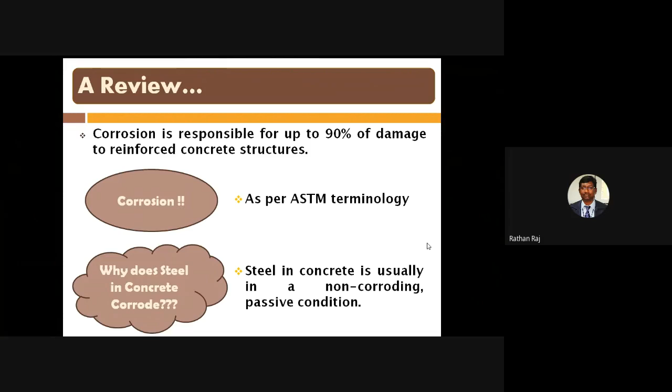Before the corrosion starts, the steel is in the passive state. After that, because of these reactions—electrochemical reactions or carbonation—corrosion starts on the reinforcement, and it builds up on the surface of the reinforcement. Further, the corrosion reaches the surface by means of a crack. So it is called the cancer of the concrete.

So when you look at the reinforced concrete on the surface, it is over the years together that this reaction will take place.

We cannot see what is happening inside the concrete. So once it reaches the surface of the concrete, only then can we identify that cracks have formed on the building. If we are not aware of this kind of crack, eventually there will be falling of the concrete. After the concrete falls, if the rod gets corroded, we have to take more remedial measures for repairing the concrete. So once any crack is available in the reinforced concrete, immediate necessary care must be taken to avoid further corrosion and spalling of the concrete.

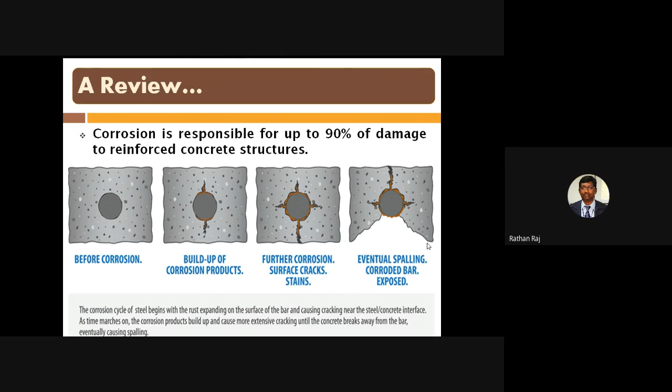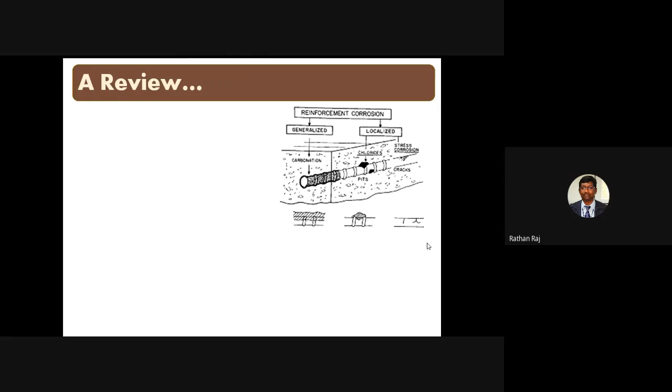Now, particularly when we talk about reinforcement corrosion, there are two different types of corrosion. One is electrochemical corrosion, also called chloride corrosion. Another one is carbonation. Both the electrochemical corrosion and the carbonation occur due to certain reactions caused by external forces.

Now, particularly when we talk about chloride-induced corrosion in steel reinforcement, the concrete is often used to serve in an environment where seawater or deicing salts are present.

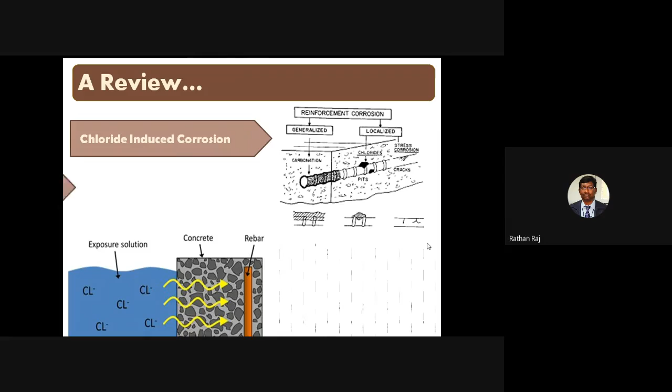So this corrosion is termed localized corrosion. Now when we talk about the next type, corrosion due to carbonation, this is called generalized corrosion. In concrete, when carbonation attacks to the level of the steel rebar, the normally alkaline environment which protects the steel from corrosion is replaced by a more neutral environment. Under these conditions, the steel is not passive and rapid corrosion begins.

This carbonation corrosion may occur after 10 or 20 years, and it will not start immediately if we are using high performance concrete, high strength concrete, or very dense concrete. So it will take years together. After that, due to some deterioration and the porous structure of the concrete, this carbonation corrosion takes place, reaching and affecting the passive layer on the steel.

So first we have to know what carbonation actually is. Carbonation is nothing but the result of the cement hydration process, when cement reacts with water and converts to calcium hydroxide. That is the important element which gives strength to the concrete. As we already know, there are Bogue components - four Bogue components, C2S and C3S - which help improve the strength of the concrete. How does it improve the strength? By forming calcium hydroxide solution, the calcium hydroxide element.

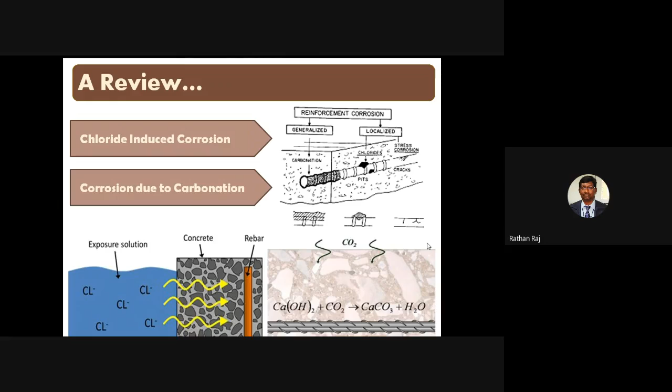When the concrete surface is exposed to deicing salts or seawater, the chloride content is automatically absorbed by the concrete, and it reaches the surface of the rebar, immediately affecting the passive layer on the rebar.

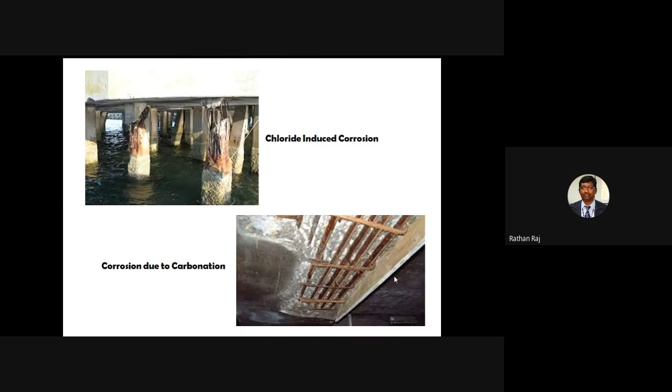Immediately the spalling of the concrete takes place because of the corrosion. Now, what are the factors influencing the chloride threshold? When we talk particularly about chloride induced corrosion, it depends on many factors.

The first factor is the type of cement we are using: the fineness of the cement, the amount of gypsum available, and the blending materials. That means the composition of the material. So we have to be very careful about the composition of the materials available in the cement. And also, if we are going to use some supplementary cementitious material, we have to be very clear and have knowledge of the chemical compositions available.

The second one is water cement ratio. We use different water cement ratios, improving the strength of the concrete by lowering the water cement ratio. If you lower the water cement ratio, we have to take care whether there is any porosity in the concrete, that means any voids in the concrete. So we have to take necessary care in the compaction also.

The next point is the curing and also the compaction. What type of curing, whether we are going for water curing, whether that curing is done for 28 days, or what kind of curing method we are going to use. And during preparation of the concrete, whether the compaction is done well or not. This all leads to the porosity.

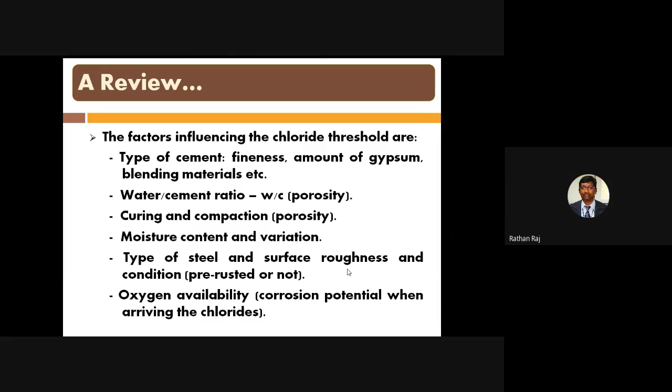Then the type of steel we are using, the surface roughness of the steel, the present condition of the steel, and then the oxygen availability. These are all the factors influencing chloride induced corrosion.

Now, particularly the effect of pH on corrosion. Concrete always has a pH value higher than 10. So the metal becomes passive and the corrosion rate decreases with increasing pH value. Normally in concrete the pH value is nearly 11 to 13.5, and approximately the average value is taken as 12.5.

So what is actually the effect of pH on corrosion? The reinforcing steel in concrete is usually in the passive state because of the high alkalinity of the concrete pore solution. However, the passivity may be lost, and corrosion occurs on the steel due to the decrease of pH due to carbonation. As already told, carbonation does not happen immediately.

After maybe 10, 15 or 20 years only can you identify the carbonation, where calcium hydroxide is converted to calcium carbonate. This happens because of the loss of pH in the concrete. So the steel bar used in reinforced cement concrete is protected from corrosion only because of this high pH environment, where steel becomes more passive.

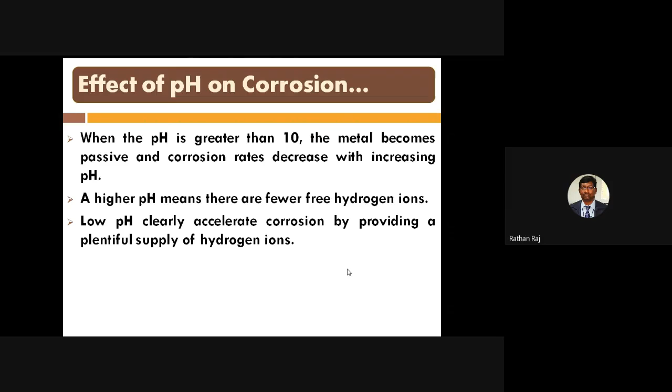Now this picture shows the iron at the anode, and due to the lower pH value, some carbonation takes place. Two electrons separate, and those electrons react with the moisture content, simply the water content, and it converts to hydroxyl ions. So more hydrogen ions develop in the concrete, and it will affect the reinforcement. Then the pitting corrosion will start.

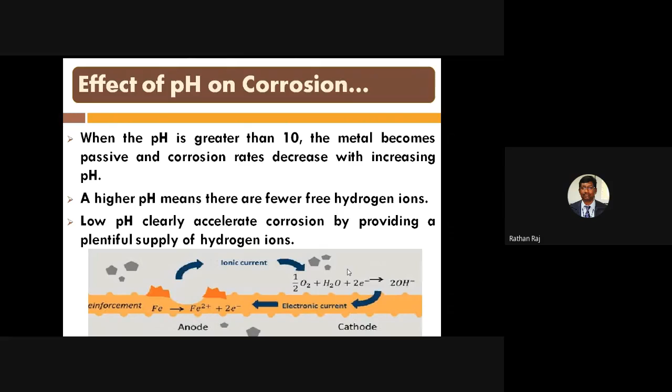So in case of reinforcement corrosion, what are its consequences after the corrosion? This figure is the most simple and descriptive model for the service life of a reinforced concrete. The corrosion will not take place immediately unless the steel contacts water, because it is a reinforced concrete. The reinforced concrete is a hardened material, and the concrete we are using is a non-porous material through good compaction. So the initiation period will take more time.

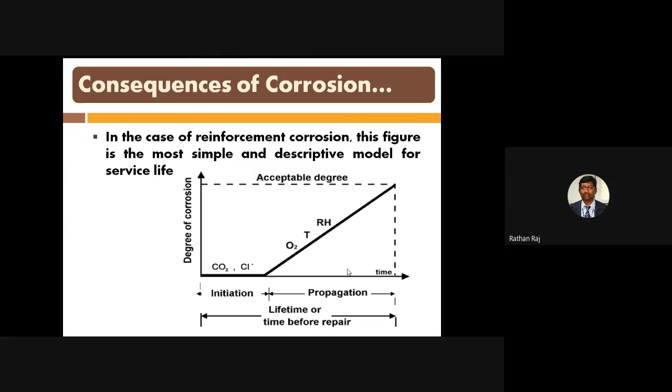Once the initiation starts, it is all due to the relative humidity in the particular region, the temperature, and also how much oxygen and carbon dioxide, and sometimes chloride, is present, for example nearby seawater penetration or de-icing salt. So depending on all these factors, it will start the corrosion. Once the corrosion is initiated, it will propagate. We cannot prevent it unless we identify that cracks have developed on the concrete; only then will we know that corrosion is taking place in the reinforced concrete.

So this is a well-known model, and it is considered that there is an initiation period, which consists of the time from the erection of the structure until the aggressive agents, which may be chloride or carbonation, reach the rebar and depassivate the steel. So that passivation layer immediately gets affected and becomes depassivated. And then a propagation period from the steel depassivation until a certain unacceptable level of deterioration is developed in the structure.

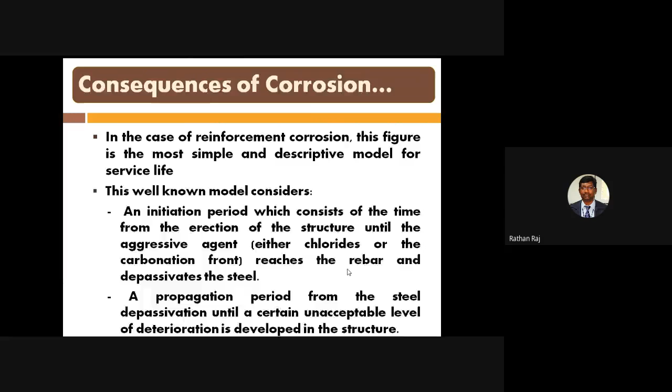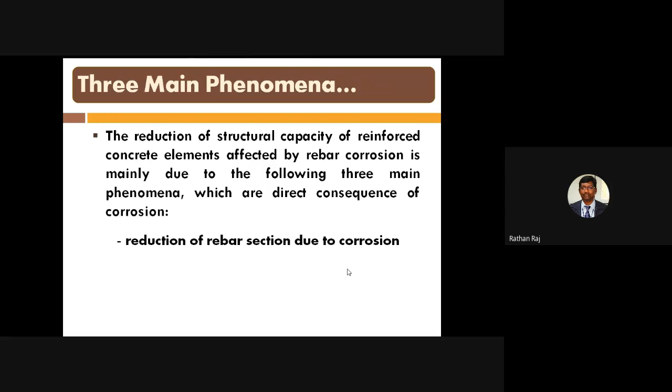So there are three main phenomena when we talk about the reduction of the structural capacity, or the reduction of the strength of the reinforced concrete element affected by rebar corrosion, which are direct consequences of the corrosion. What are the phenomena? The first is reduction of the rebar section due to corrosion, the second is a reduction of the bond strength, and the third is loss of concrete integrity due to cover cracking, which also leads to spalling of the concrete.

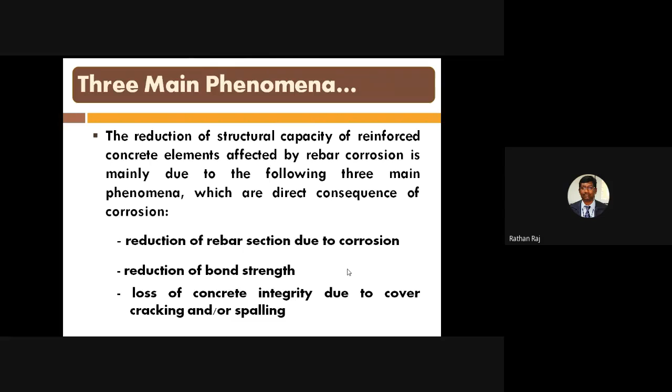Now there are some methods with which we can prevent the corrosion. A variety of methods are available nowadays, and when we use them we can at least slow down the corrosion process. The most common preventing methods are the galvanization method, the cathodic protection method, electrochemical chloride migration, which is called the desalination method, the realkalization method, and fifth, corrosion inhibitors, along with repair techniques. The first four methods are well known. If you go through the internet or some literature, you will get the process and procedure to be adopted for these methods.

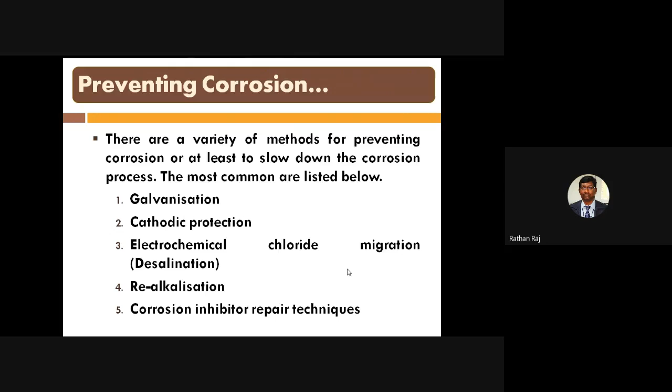So particularly I want to talk about corrosion inhibitors, because nowadays people are using more corrosion inhibitor in the concrete from the starting stage itself. 10 or 20 years ago, people were not aware of applying non-corrosive paints or chemicals on the steel rebar. Now in major construction, and even in smaller construction, people are very much aware, and before the steel reinforcement is embedded into the concrete, the steel rebars are applied with some chemicals.

So what actually is a corrosion inhibitor? It is a chemical compound. Various types of chemical compounds are available in the market nowadays, and when added, they decrease the corrosion rate of the material. There are many types of corrosion inhibitors available: anodic inhibitors, cathodic inhibitors, mixed inhibitors, and volatile corrosion inhibitors.

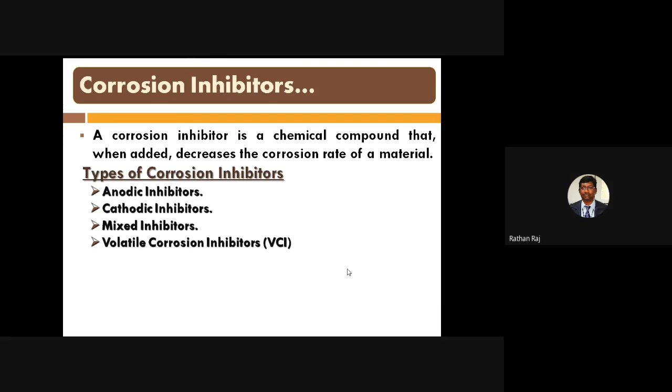How does the corrosion inhibitor work? Inhibitors work by the formation of a coating on the material. This coating prevents the access of corrosive substances to the material surface, protecting the passive layer. The inhibitor molecules either attach to the metal or react with the surface to form a thin and adherent layer. This is the way corrosion inhibitors work.

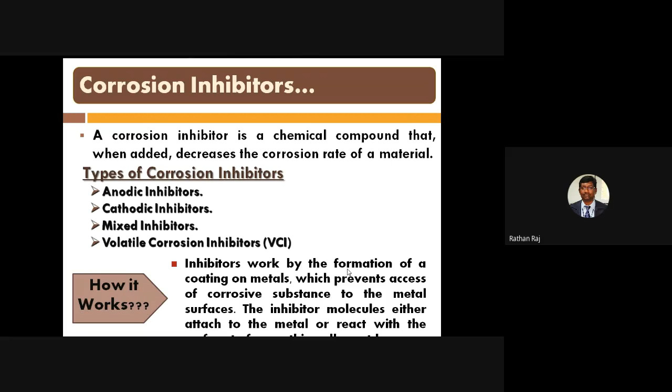In the market nowadays, many types of corrosion inhibitors are available. Sometimes it will be in the form of chemical substances, or in the form of a liquid, or in the form of a paint. So in this decade, actually, all the construction companies, from small companies to big companies, are using corrosion inhibitors. So nowadays, the common method of preventing corrosion in the construction sector is using a corrosion inhibitor.

So now, when we talk about corrosion, people started very early to develop high strength concrete or high performance concrete, particularly for corrosion in reinforced concrete. So they want to develop more dense concrete by using different materials, incorporating some chemicals, some mineral admixtures, some chemical admixtures, by developing high strength concrete and high performance concrete. So we are more concentrated on how to develop the strength of the concrete.

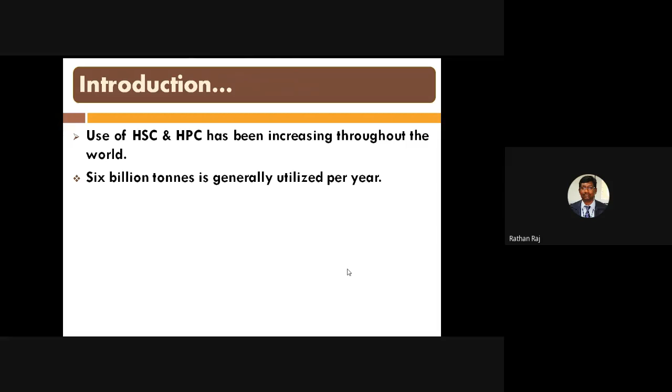So when we talk about high strength concrete or high performance concrete, it is only the concrete. So how much concrete is being utilized per year? The statistics say that every year 6 billion tons is utilized in the construction industries. So when we talk about concrete utilization, we should talk about cement. For developing high strength concrete or high performance concrete or any other kind of concrete, the basic ingredient is cement.

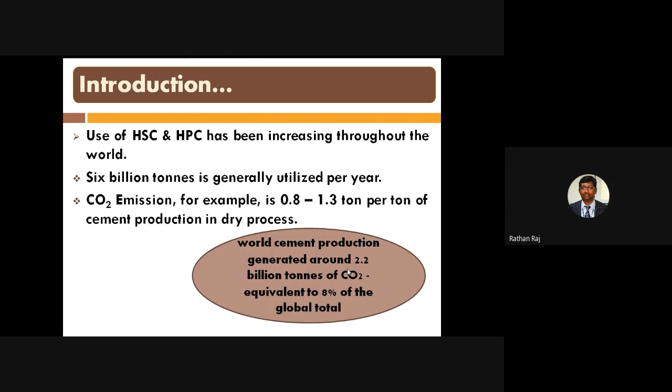So cement production will emit carbon dioxide. For example, 1 ton of cement production will emit nearly 0.8 to 1.3 tons of carbon dioxide in the dry process. And normally, people say that 1 ton of cement production will emit nearly 1 ton of carbon dioxide. Moreover, world cement production generated nearly 2.2 billion tons of CO2, which is equivalent to 8% of the global total emission of carbon dioxide. So cement production holds 8% of the global total emission. So we have to minimize the cement content, but in no way compromise the strength of the concrete.

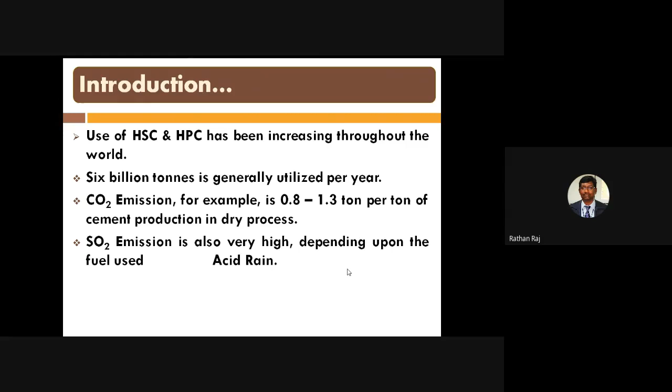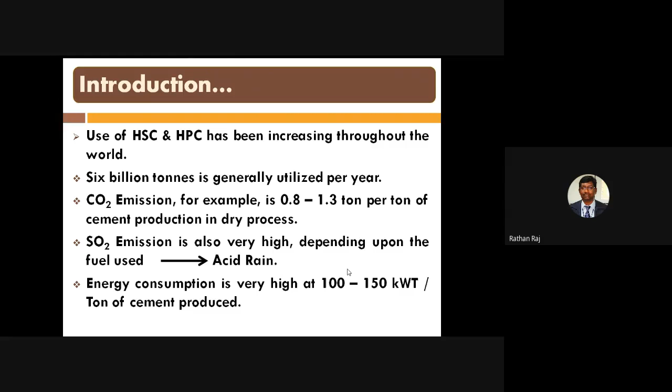Now, besides CO2 emission, another one is SO2 emission. It is also very high depending on the fuel which is used. It leads to acid rain. And another point: when we use more cement, the energy consumed is also very high, because we are producing cement by the dry process using a huge amount of heat. That will be nearly 100 to 150 kilowatt per ton of cement produced. Because of all these points, nowadays SCMs are to be used.

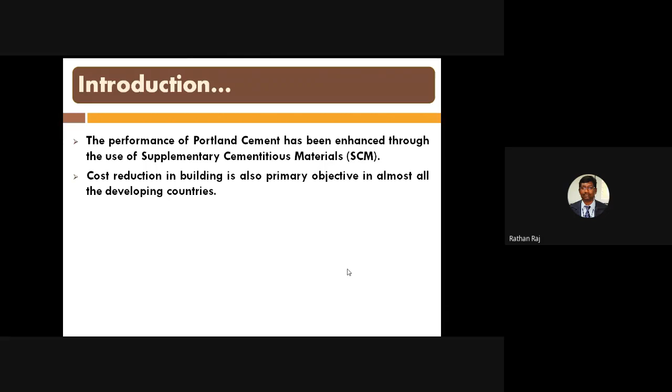So the performance of Portland cement has been enhanced through the various uses of supplementary cementitious materials, as we know. Initially, supplementary cementitious materials were used only to improve the performance of the concrete; later we found another aspect, cost reduction in building. So when cement is replaced with these supplementary cementitious materials, automatically the cost will be minimized. Not only the cost, we can reduce carbon dioxide emissions and SO2 emissions also. All the developing countries are doing this now.

And now, particularly, the mining and mineral industries produce a huge amount of waste, which is called byproducts. It is not otherwise put to any use. Only limited byproducts are identified which are rich in silica and rich in calcium, with some chemical components satisfying the requirements of cement. Moreover, it is equivalent to cement also. That is being widely used nowadays.

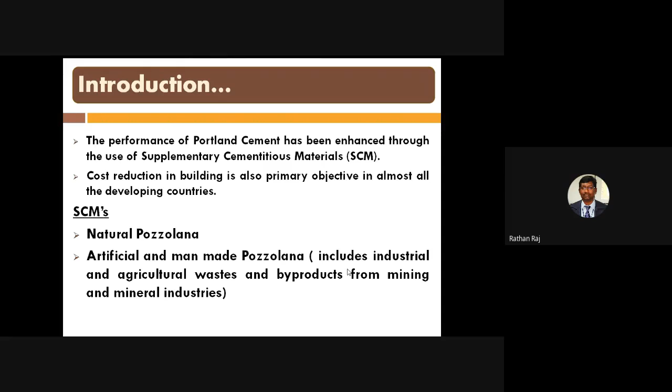We'll discuss one by one. So we'll talk about the classification of the waste and byproducts. There is one report from the Energy and Resources Institute, called the TERI report. The TERI report grouped the classification of the waste and byproducts into three groups.

So 30 years back, people used to replace part of the ordinary Portland cement with fly ash. Nowadays we know Portland pozzolana cements are available everywhere. It is fly ash based, or sometimes slag based cement is also available. So ordinary Portland cement converted to another product, the Portland pozzolana cement, in terms of fly ash and slag. These are the main two types of cement being utilized in India nowadays.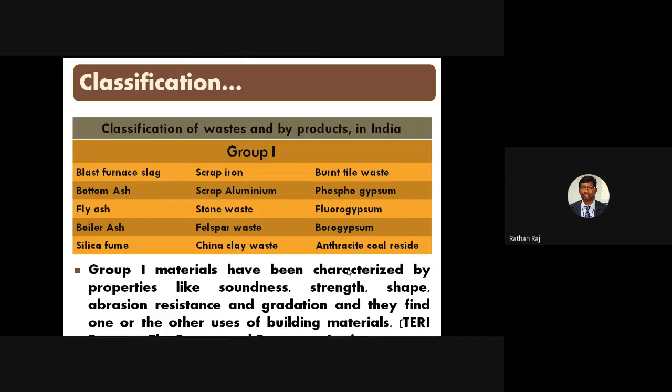And the group 2 waste, as the TERI report classified it. Group 2 materials are used on a limited scale because they require some processing before utilizing in concrete. That's why these materials are grouped into the second group. Some of them did not quite satisfy unhindered utilization or conform to the Indian standards.

The group 1 waste conforms to the Indian standard because its chemical composition is nearly equal to cement. Sometimes one chemical compound is in more amount, sometimes less, but all the chemical compounds are available. But that is not the case with group 2 waste. Some group 2 materials are quite unsatisfactory because they do not conform to the Indian standards.

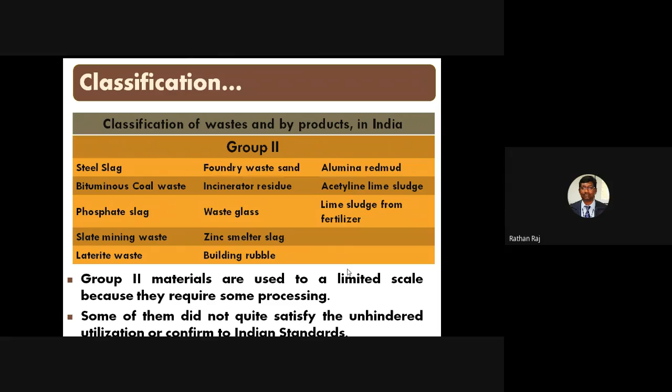But still there are a few wastes whose properties have not been properly identified. So if you start research on a particular material, starting from the characterization and studying the properties, it is good research. You will get a good outcome. These are all the group 2 waste.

Now the group 3 waste: these have been investigated quite thoroughly, but there are no standards or specifications available. That is because of some undesirable constituents like alkalis, P2O5, SO3, and titanium oxide present in this material.

So with group 3 waste we have to be more careful when selecting it for use in concrete, and most probably this waste should be avoided. If you want to use this waste, you have to be very careful. You have to know the characterization, the properties, the physical and chemical composition. After studying all these, we can start replacing cement. These are the 3 classifications.

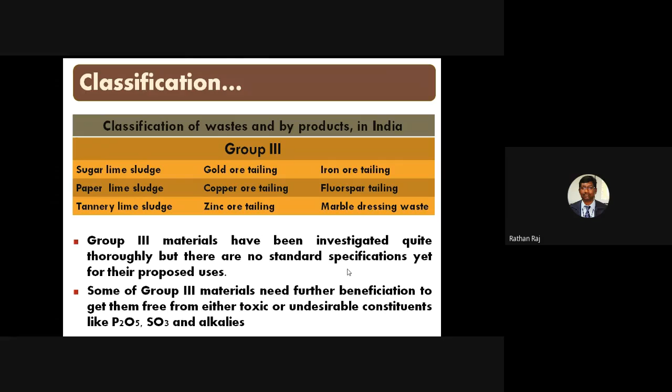So here, in this research or investigation, I used metakaolin and red mud as supplementary cementitious materials. Metakaolin is a natural pozzolana. Technically it is called a kaolinite product, formed from kaolin, which is abundant in India. We have it in two places: one is Jharkhand, another is Kundara in Kerala.

This material was obtained from English Indian Clays Limited, located in Kerala, and the metakaolin is technically called Metacem, or commonly a China clay material. After heating the kaolinite product to 800 degrees, this Metacem or metakaolin is produced.

This is a natural pozzolana, and the red mud is nothing but the waste product from the alumina-related industry. This waste material was obtained from the Malco industry located in Mettur. After extraction of the alumina, this is the waste material, which is enriched with caustic soda, meaning a high pH value. It is left as a waste material.

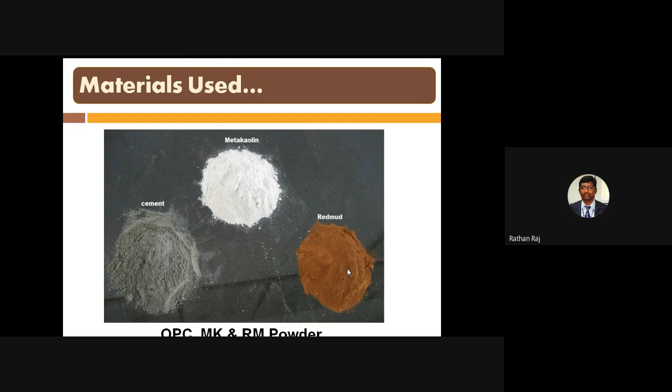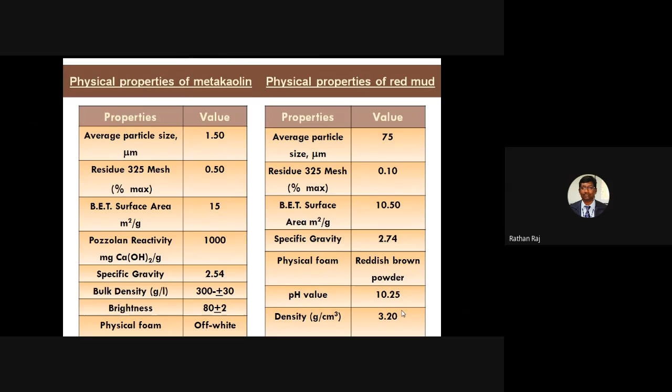Now this is the physical properties of the cement. The physical properties you know very well, so I don't want to discuss them elaborately. Come to the physical properties of the metakaolin. The reason I selected metakaolin is its pozzolanic reactivity, due to the silica content and calcium content present in the material. And as a physical property, the red mud has a pH value which at that particular time was more than 10.25. This 10.25 is maintained throughout the concrete life.

So the chemical composition of the cement, metakaolin and red mud. As I already told, whatever supplementary cementitious material or replacing material is used for the concrete, we should be more concerned about what chemical components are available. For example, in the metakaolin, the silica content is very high, 52.3%. And the unwanted Al2O3, aluminum content, is also available. It depends on the variation of the extraction and is also time dependent. At that particular time the amount was very high, and the iron content is very low.

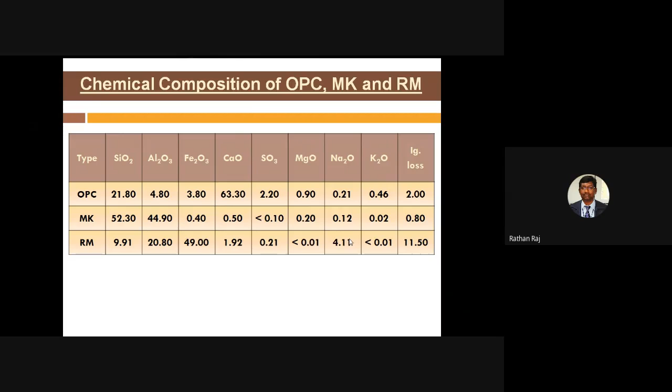But in the red mud, see that there is low silica content. Alumina content and iron content are very high. Calcium content is very low. Some unwanted alkalis are also present, namely Na2O, at a high amount of 4.11, and some others are also found, TiO2 and so on.

Let me discuss the XRD. Why is the XRD pattern of the cement and of the supplementary cementitious material needed? We have to be in a situation to identify what elements are present in the material. When we see only the chemical composition, we cannot know easily. We have to identify the particular elements and whether each element is reactive or not. So this is the XRD pattern of the cement, which identifies the peaks and low curves. Each point will be identified.

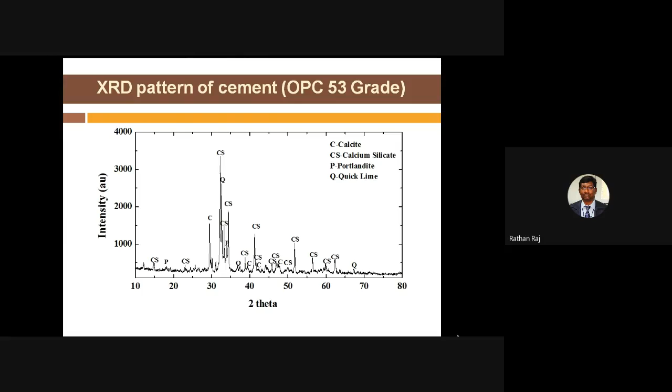C is a calcite element; wherever you see C, it is calcite, and CS is calcium silicate. P is portlandite, and Q is quicklime. Quicklime is nothing but calcium oxide, the calcium content. Now the CS content is the calcium silicate content. Before hydration, the cement has more unreactive calcium silicate. When it reacts with water, that calcium silicate converts to calcium silicate hydrate in the form of C3S and C2S, and further it reacts with the silica present in the material, and more calcium silicate hydrate bonds are formed. It's a hexagonal bond which improves the strength of the concrete.

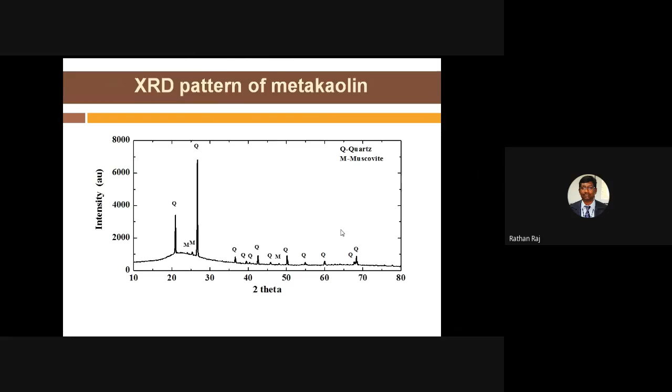Now when we see the XRD pattern of the metakaolin, only two important elements are identified. One is quartz, another one is mica, called muscovite. And in the XRD of red mud, many elements are identified: calcite, gibbsite, hematite, hydrogarnets, perovskite, quartz, and rutile. See, the unwanted and undesirable material called rutile is identified in this material. This rutile is nothing but titanium oxide.

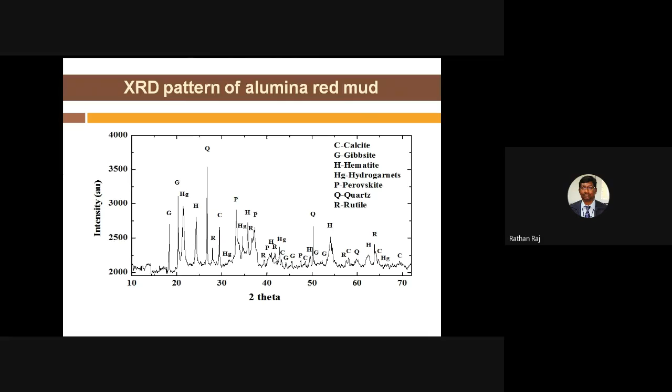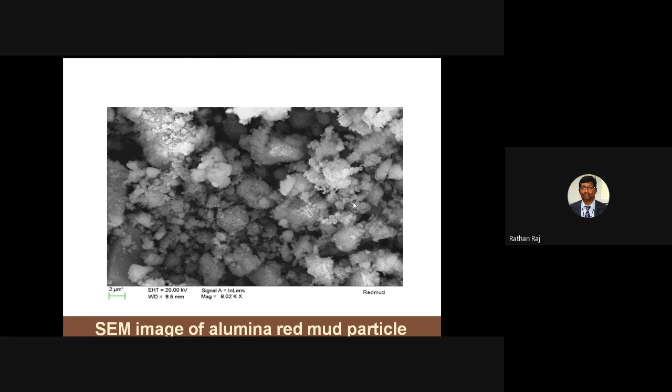When we talk about corrosion, we should talk about the diffusion coefficient, notated as DC, the DC of chloride ions. This increases with a rise in water-binder ratio, and decreases with an increase in mineral admixture or other additives.

So when we use additives like mineral admixtures replacing cement, increasing the amount of mineral admixture surely decreases the diffusion coefficient value. The diffusion coefficient tends to increase with increased voltage of 30 volts in a steady state method.

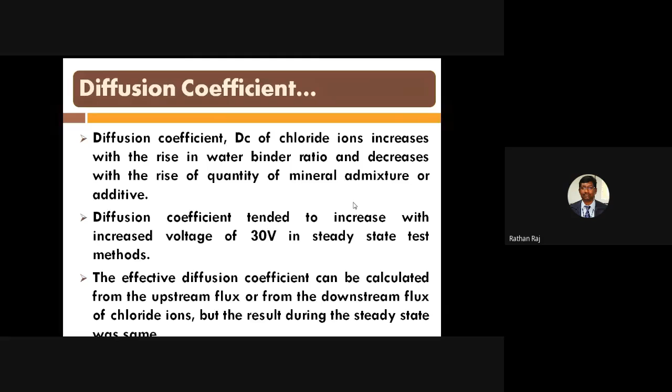The effective diffusion coefficient can be calculated from the upstream flux or from the downstream flux of the chloride ion, but the results during the steady state were similar, as we can see elaborately here.

For diffusion coefficient, two methods are being used nowadays to find the diffusion coefficient. The very common method is the rapid chloride penetration test, which is based on American Standard Testing Method C1202-97.

Nowadays in the literature you can see another method called accelerated chloride ion diffusion test, simply called ACID. This is nothing but a modified RCPT, the rapid chloride permeability test, also conforming to ASTM 1202. There is no separate code available, and the procedure is the same as used for the rapid chloride permeability test.

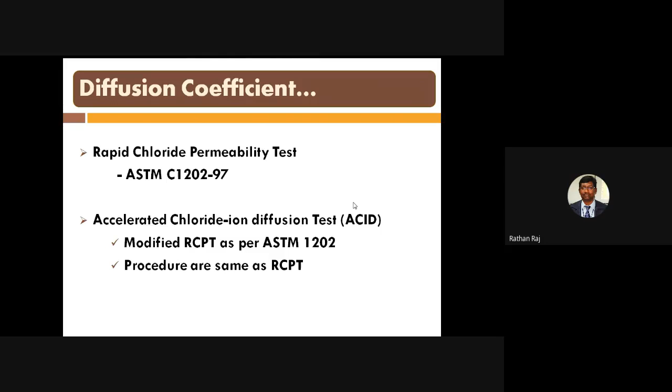This is the detailed drawing of a diffusion cell. The diffusion cell consists of two chambers or containers: one acting as negative, the other as positive. In the negative, NaCl solution, sodium chloride solution, is used, and in the positive, NaOH of 3 normality solution is used.

This is the concrete disc, 50 mm thickness, 100 mm diameter, which is carefully sealed with sealant to prevent solution from coming out of the chamber, and it is screwed up. This is the schematic view of the diffusion cell.

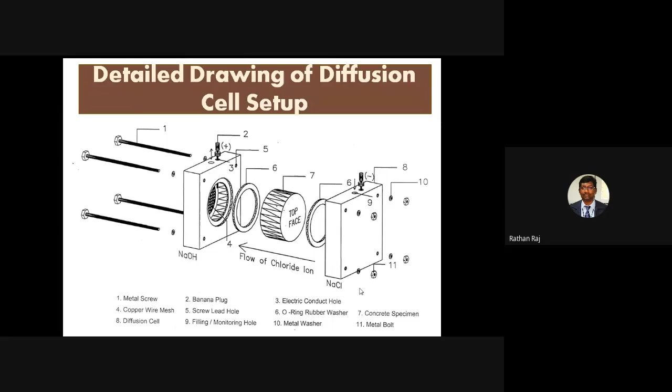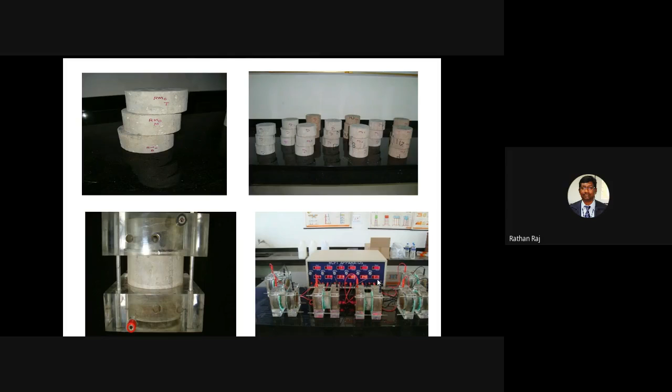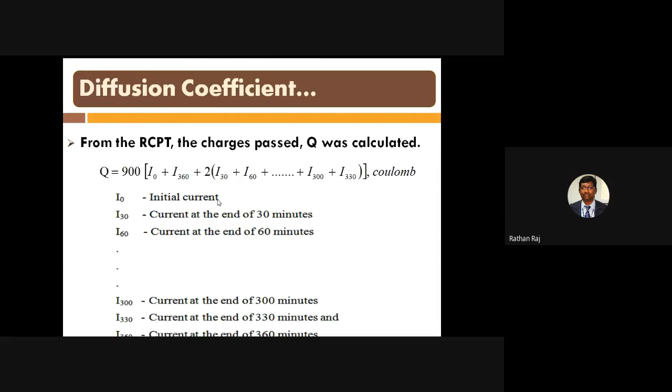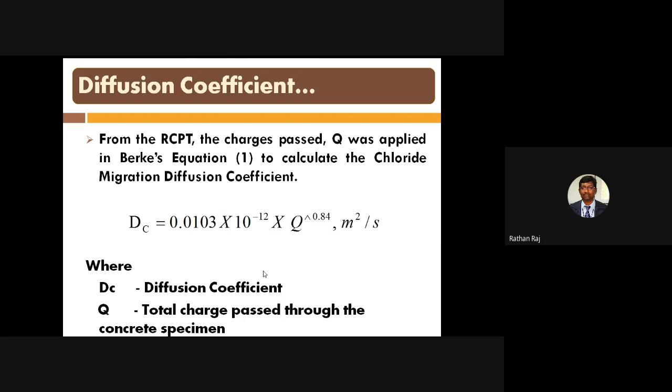The diffusion coefficient value is calculated using Berke's equation. After substituting the Q value in this Berke's equation, we get the diffusion coefficient, DC. Here the only variable is the charge passed, the Q value. After that we get a value denoted in meters squared per second. Now, the limitation of the chloride diffusion permeability.

So what are the limitations? If the coulombs value, the charge passed Q value calculated in coulombs, is more than 4,000, we can conclude that the chloride permeability is high. 2,000 to 4,000 is a moderate value. 1,000 to 2,000 coulombs, the chloride permeability is low, and 100 to 1,000 coulombs, it is very low. When it is less than 100 coulombs, it is negligible, with no chloride permeability. Based on this coulombs value, we can identify whether the produced concrete is good in terms of chloride permeability, or low, or moderate.

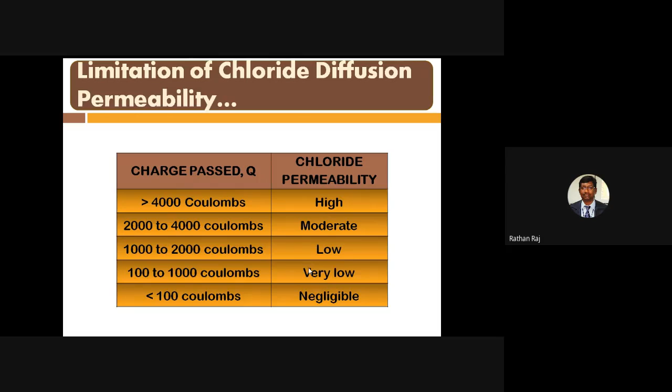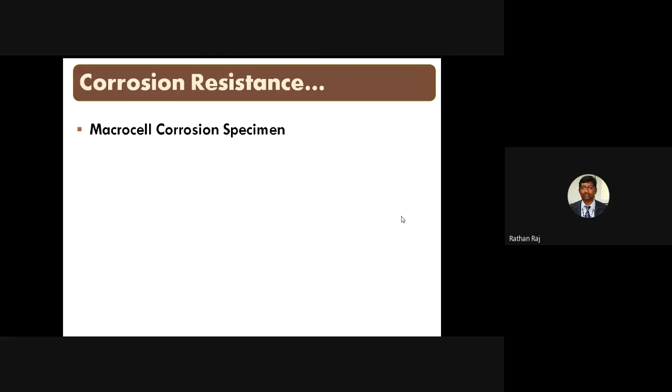Now, when we talk about corrosion resistance, there are two different types of specimens used for identifying the corrosion of the steel reinforcement. One is the macro cell corrosion specimen, which will be looking like that.

Always for the macro cell corrosion, a concrete beam or rectangular specimen is casted, having 3 rods. Normally the rod is 10 mm thickness. One is acting as an anode, another 2 are acting as cathode. This will be connected to the potentiostat, and then epoxy resins are applied on the surface of the concrete.

At the top, there is one container which is fixed, and it will be sealed by using some sealant, and then sodium chloride solutions are allowed to stay inside the container. After some period of time, 15 days, or sometimes we go for 30 days, depending on the period.

Due to that, the chloride content present in the sodium chloride will be absorbed by the concrete, and it will reach the anode, and it will affect the passive layer on the steel. This is how the macro cell corrosion test is done.

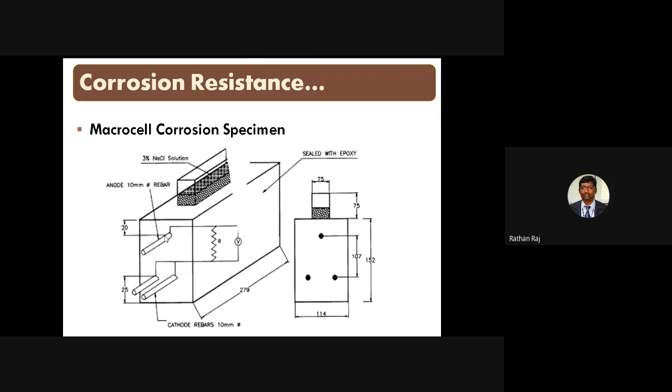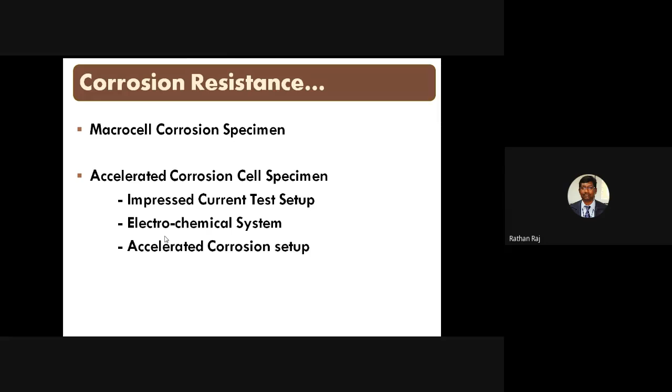The other test is called the accelerated corrosion cell specimen. This accelerated corrosion cell specimen is always in a rectangular beam or a cylindrical specimen. It is also called an impressed current test setup, or electrochemical system, and normally it is called an accelerated corrosion setup. So in this research, I used the accelerated corrosion setup.

This is the accelerated corrosion setup. We have a container filled with sodium chloride solution. This is the concrete, embedded with the rebar. Some PVC sleeves are used to prevent corrosion at the top place.

Carefully it is immersed into the solution up to 3/4, or sometimes only half of the solution. The diameter of the bar used here is 16 mm, and it is connected with the positive terminal - this is called the anode. For the cathode, the negative connection, a stainless steel plate was used.

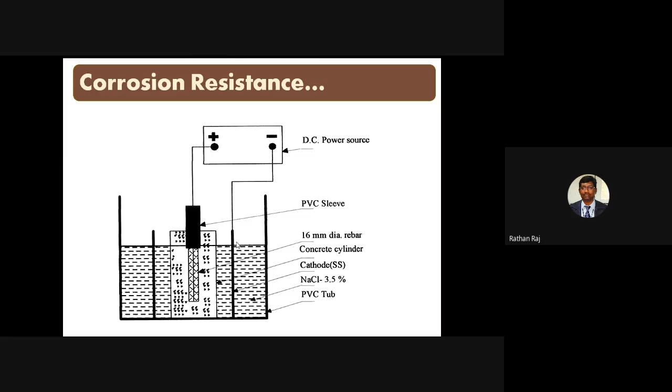To create the aggressive environment, we have to use the sodium chloride solution. Here 3.5% sodium chloride was used, acting as an electrolyte. Half of the cylinder or 3/4 of the cylinder was immersed in this salt water.

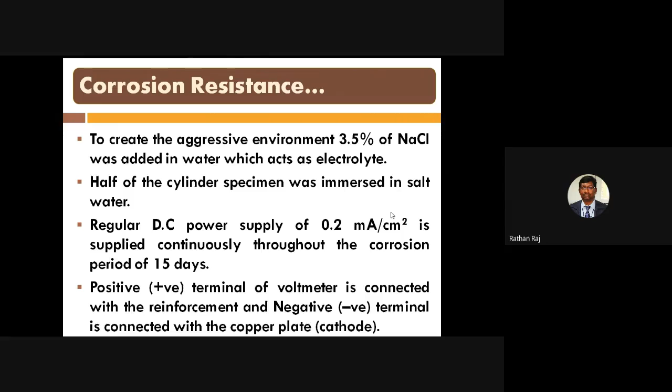A regular DC power supply of 0.2 milliamps per centimeter squared is supplied continuously throughout the corrosion period of 15 days. The positive terminal of the voltmeter is connected with the reinforcement, and the negative terminal is connected with the copper plate, which is acting as the cathode.

This picture shows the entire setup of the accelerated corrosion cell setup. Here all the rods - the anode - are connected to the positive, and here this copper plate is connected to the negative, acting as the cathode.

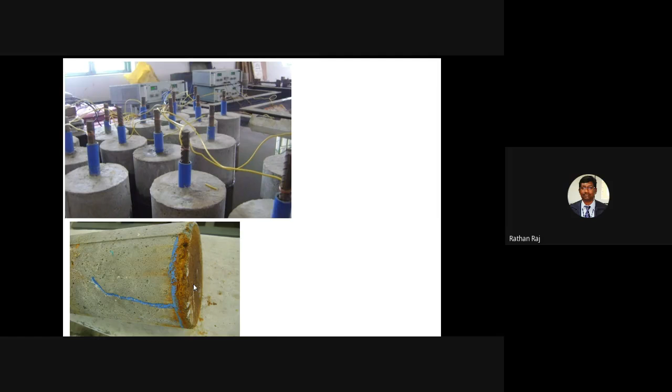After 15 days, corrosion takes place, forming and developing cracks on the concrete. At the bottom you can see the color changes, which clearly shows there was corrosion. After that, using the split tensile method, the concrete is carefully split, and the reinforcement is carefully taken away from the concrete.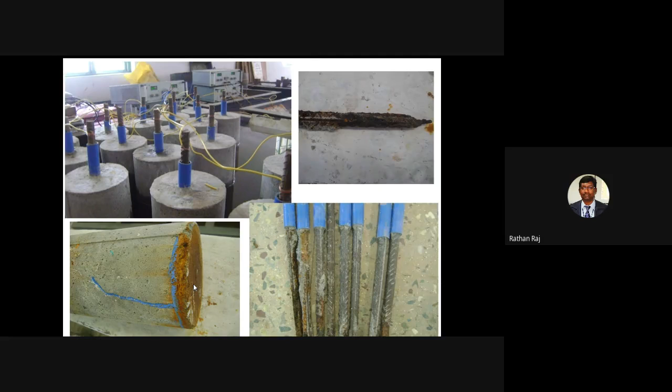These are all the reinforcement bars, particularly in the most severe condition. This is the corroded rod after 15 days of accelerated corrosion.

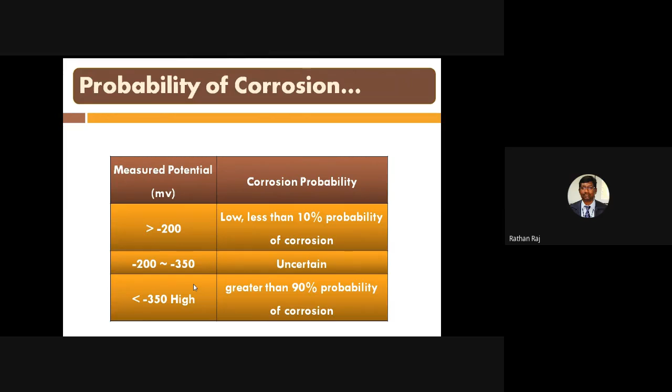So what is the probability of corrosion? By measuring the potential in millivolts from the ammeter reading, we can conclude the probability of corrosion - whether it is low, uncertain, or greater than 90% probability of corrosion.

So now I want to discuss with you some results quickly, based on these two methods: diffusion coefficient and chloride resistance. Here I used metakaolin as one supplementary cementitious material separately, red mud as a supplementary cementitious material separately, and the combination of metakaolin and red mud with different proportions like 50:50, 60:40, 70:30, and 80:20.

Also, four different types of high strength concrete were developed with varying water binder ratios: 0.40, 0.38, 0.36, and 0.33, which correspond to M30 grade, M40 grade, M50 grade, and M60 grade, ranging from 30 Newton per mm squared to 60 Newton per mm squared, designed based on the mix proportion.

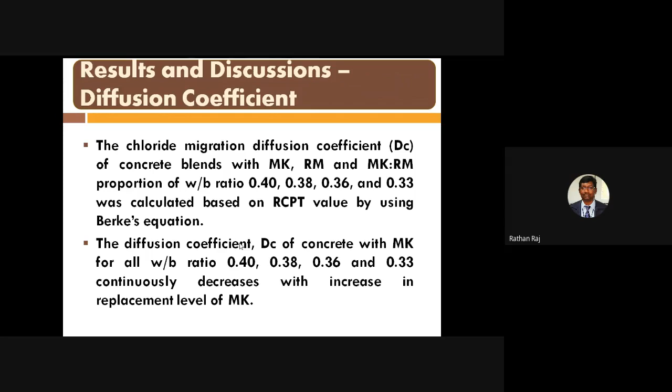This diffusion coefficient was calculated based on the RCPT value only, rapid chloride penetration test value. After that, applying Berke's equation, the diffusion coefficient was calculated. So there are some notable values.

This graph shows that for the particular metakaolin replacement, starting from 2% up to 14%, at all replacement levels the diffusion coefficient is decreasing. As we already know, when we use some supplementary cementitious material in the concrete, automatically the diffusion coefficient value decreases. The reason is that the supplementary cementitious material has more silica content.

So there is some free calcium hydroxide left behind. It is reactive, but there is no reactive silica present at that point. So when we aggravate or create the reaction of the calcium hydroxide, it will react with the silica content and lead to denser concrete and increase the strength of the concrete.

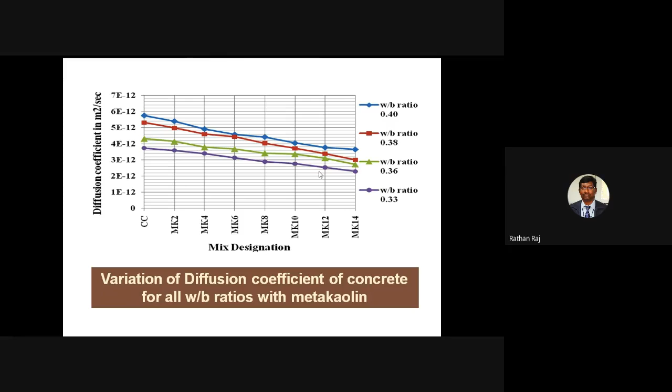Also, when we modify the water cement ratio from 0.40 to 0.33, lowering the water cement ratio improves the strength of the concrete. So here the strength is also increasing, and correspondingly the diffusion coefficient is also decreasing. This shows very clearly that the use of supplementary cementitious material will always improve the diffusion coefficient.

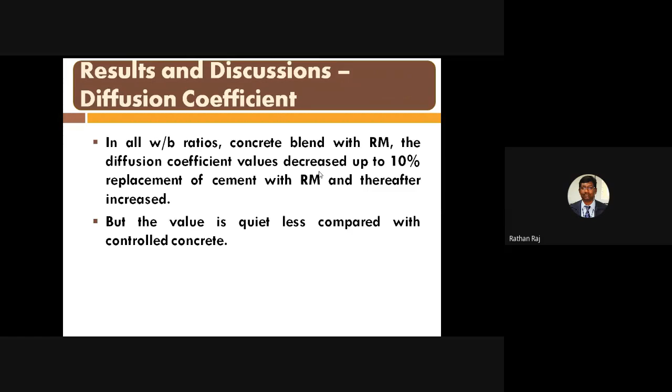But it is not the case with red mud addition. Red mud addition up to 10% shows a decrease in diffusion coefficient. Further, after 12% and 14%, there is some increase in value, but that increase, compared with the controlled concrete, is moreover equal, or sometimes may be very, very less in amount. The reason is that red mud after 8% or 10% slightly increases the diffusion coefficient.

Because when I noticed in the chemical composition, there are some alkalis present, as well as unwanted alumina content and iron content that are more, while silica content and calcium content are very, very less. So there are some unreacted chemical components that do not react with the calcium hydroxide. So automatically the diffusion coefficient increased.

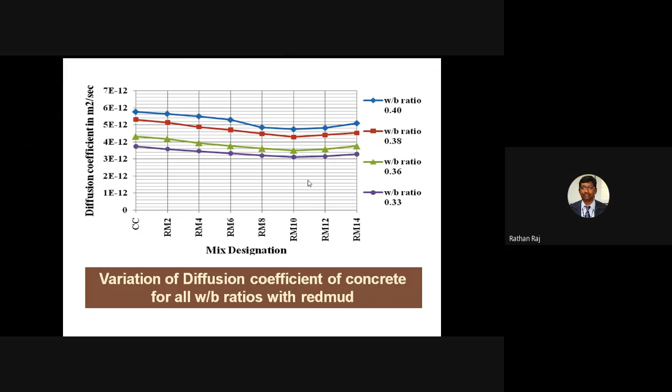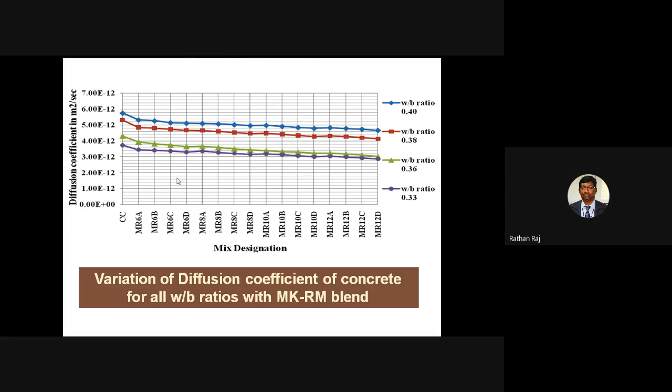These are all 8% replacement, 10% replacement, 12% replacement. So at all these replacement levels and all water binder ratios, the diffusion coefficient is decreasing in a consistent manner. This shows that adding supplementary cementitious material always decreases the diffusion coefficient.

Now, when we come to the accelerated corrosion setup, there are two main focuses for the study of steel corrosion. One is passivation of the steel in a certain alkaline condition. The other is the acceleration effect of chloride ion in the pore solution. So initiation of current corrosion is either due to the reduction in alkalinity.

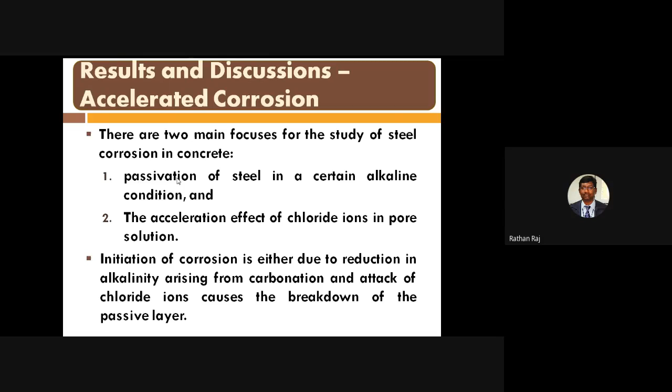That is the very first point, because at a later stage, after 10 years or 15 years, because of the reduction of alkalinity, corrosion starts, carbonation starts. Carbonation leads to corrosion. So here, the initiation of corrosion is either due to the reduction in alkalinity, arising from carbonation, and the attack of chloride ions causes the breakdown of the passive layer.

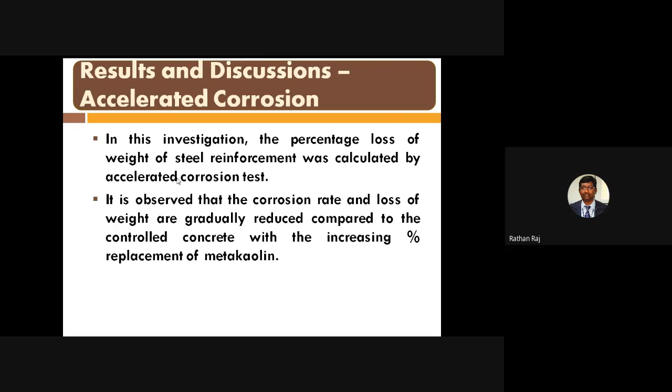So in this investigation, the percentage loss of weight of the steel reinforcement was calculated by accelerated corrosion. So let me go to the figure.

So when we talk about the replacement of metakaolin in the cement, normally it shows that the weight loss is very less in amount, quite less in amount.

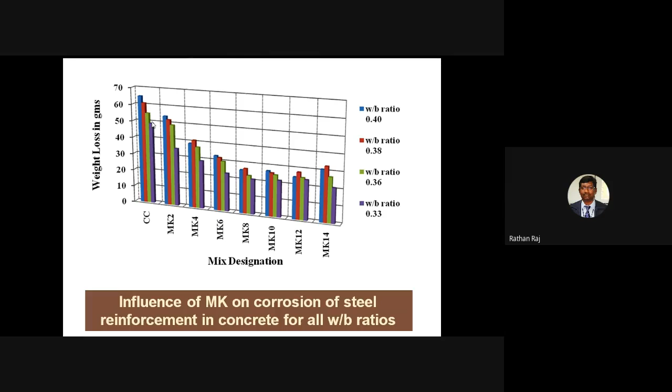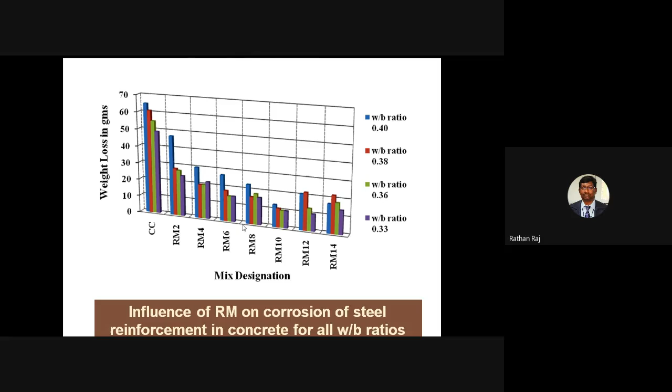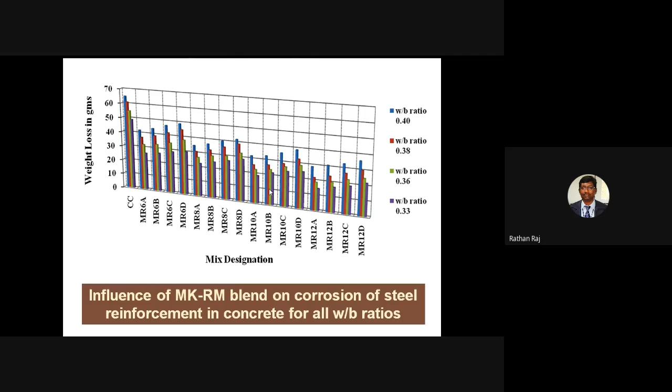There are a few more studies that have to be made. Due to the time constraint, I want to stop this presentation. So based on the study of rapid chloride penetration and corrosion resistance of the steel, it is well noted that use of supplementary cementitious material always improves the corrosion resistance and decreases the diffusion coefficient value.